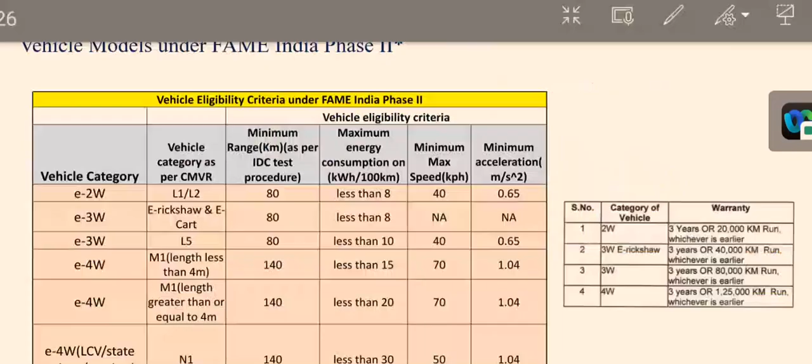So when we look at the automotive industry, just to verify, yes, my screen is clearly visible, the Indian automotive industry and opportunities. Is that slide visible? Yes, sir. It's fully visible, sir. No issues. Okay, fine.

So since the topic is more focused on India, I think there is a need to understand the Indian automotive industry or the automotive market. So if we look at the current market situation of India, of the overall automobiles running in our country, 81.2% is contributed by the two-wheeler segment, right?

Whereas nearly 14.6% of the total automobiles in India are passenger vehicles, nearly 3.1% in the commercial vehicle segment, and 1.2% in the three-wheeler segment. So it is very clear that India has more two-wheelers. It's more of a two-wheeler population.

So what happens is, I think the government has set some target to 2030, that they want to go for more electric vehicles in 2030. Right, I think those ambitions are very clear. And why are those ambitions clear? Because in some way, India is a major two-wheeler market.

Gopi, sir has been muted. Sir, you can click those three dots, go for those options. Gopi, sir has been muted, kindly unmute, sir. Yes, now it's okay, sir. Gopi, sir has been muted. Sir, please unmute, Prashant sir. Click that Cisco Webex. Yes, sir, unmuted. Wait a moment.

Is my screen visible, sir? Yes. So in addition to this strong demand in India, very recently the government of India has released this subsidy.

This particular information may not be aware to many people. This FAME subsidy announced by the central government of India, and even by some state governments, is only applicable for vehicles which meet the minimum eligibility criteria. For example, an electric two-wheeler should have a minimum range of 80 kilometers, a minimum maximum speed of 40 kilometers per hour, minimum acceleration of 0.65 meter per second square, and the energy consumption should be less than 8 kilowatt hour per 100 kilometers. These are all different eligibility criteria. In addition, the government of India has clearly notified in FAME 2 that only batteries with advanced battery technologies like lithium ion batteries, lithium ferrophosphate, lithium nickel manganese cobalt - lithium based or other advanced batteries - are eligible for this FAME 2 subsidy.

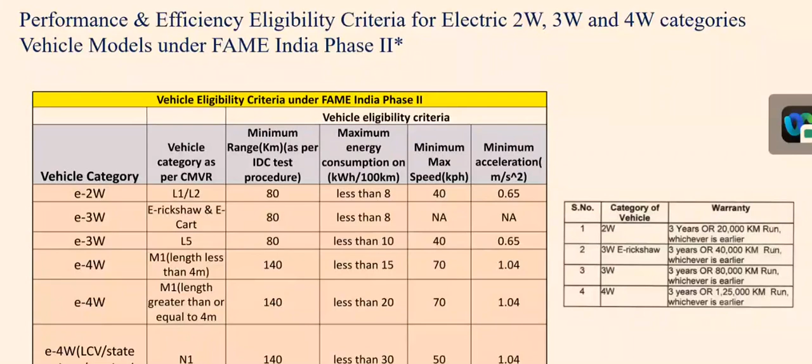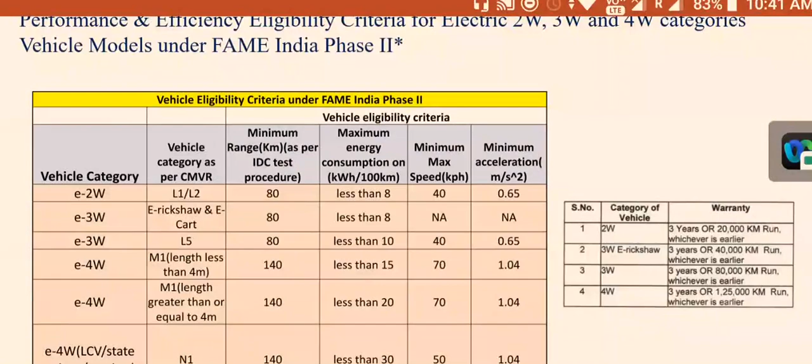There are also minimum warranty requirements - for two-wheelers, the vehicle should have a minimum 3-year warranty and 20,000 kilometer warranty minimum. All these things help us to meet the demand, the particular requirement of the customer.

Now, once we come into this electric vehicle domain, one of the challenges is throughout its product life cycle, the electric vehicle has so many challenges. When we look at cradle to gate - that means the production area, starting from raw material extraction and component production, into vehicle level assembly - we call it cradle to gate. In this region there is a lot of energy utilization happening. Even though electric vehicles are shown to be very clean, green vehicles, in my personal perspective, electric vehicles are not something very green. Obviously it has its own challenges. One of the main drawbacks of electric vehicles is its dependency on raw materials. Today's electric vehicle is completely dependent upon some key raw materials in the industry.

I think that's a threat for the whole industry. If these raw materials are not available at a point of time, then the whole system will collapse. So there is a huge demand on the material science domain, and people working in material science have a lot of scope for improvement in the electric vehicle domain, as currently the whole industry is dependent on certain key materials.

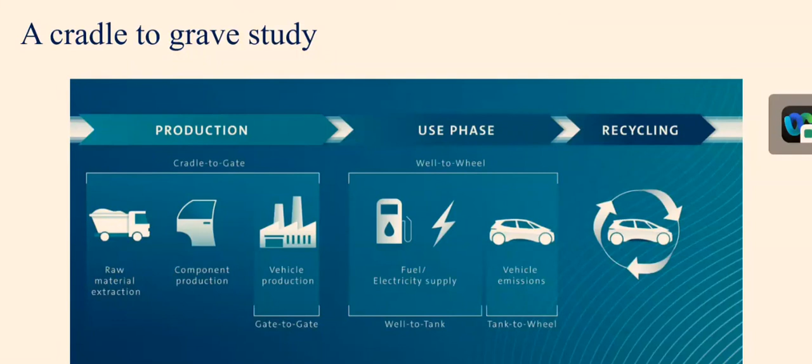The challenge doesn't end at the production and usage phase, it continues till the recycling phase. After the usage of the battery or these motors and components, what is the end of life? What is the ability of the component to get a second life? For example, if we have a battery pack, how is the vehicle or battery design carried out to provide readiness for a second life? So what is the recyclability?

There are many challenges in this area. So anyone interested in working on sustainable things has a huge scope on areas like improving the recyclability of electric vehicles, improving the recyclability of batteries, improving the recyclability of motors. What are all the things that can be done to improve recyclability?

Imagine we are using a battery pack for 15 years in an electric vehicle. After 15 years of its lifetime, what is the remaining capacity? What is the capacity fade that had happened in the battery? And what is the possibility for the battery to be used in a second life application, maybe an energy storage application? What is the possibility for such kind of things to be available for the industry?

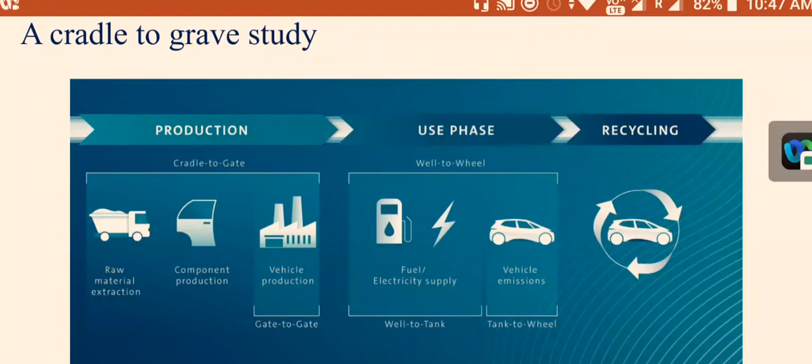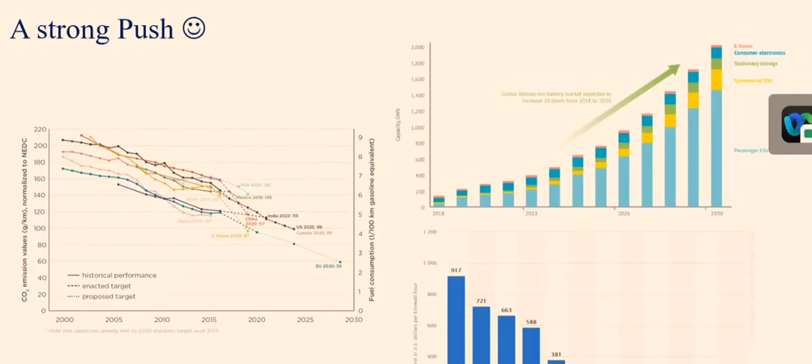So when we come to the success of this electric vehicle industry, one of the very challenging aspects is material choice and lightweight design. When we talk about material choice for this electric vehicle domain, it is actually attributed to three important areas. One is performance.

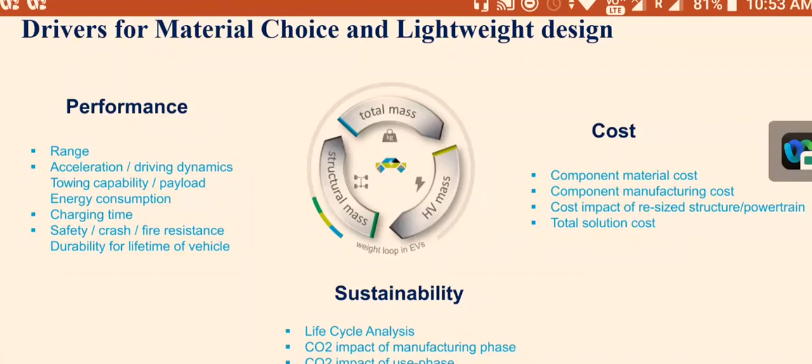So currently the industry is using the combination of aluminum, mild steel, high strength steel, and ultra high strength steel. So a good amount of research is needed in order to understand the benefits of having a blended mix of materials in the electric vehicle domain.

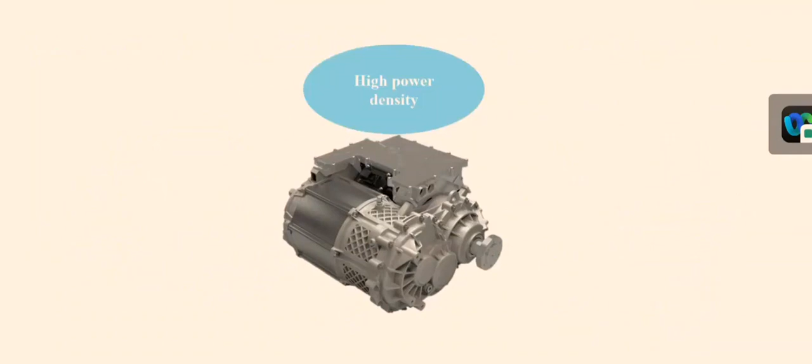So when we look at this e-drivetrain, the electric powertrain system, we have so many key areas where improvements are needed. One is high power density and high torque density. Today the industry needs an electric powertrain with a very high power density and torque density. So high power density means what? The motor, the inverter, the power electronic system, or the whole traction drive unit, as we call it, should be able to deliver very high power. At the same time, it should occupy very little volume.

And as we move toward higher speed performance requirements, customers will be expecting higher speed. Some customers may demand more than 150 km per hour or 100 km per hour. So when an electric vehicle needs to operate at such high speed, obviously a wide speed range dependency will come into the picture.

So whether the electric motor technology that we are going to utilize has the ability to work at a wide operating range, and how to improve the motor control to operate the motor in a wide operating range, because the modern electric vehicle demands motors operating close to 20,000 RPM. Can you imagine an electric motor of say 20, 30, 50 kilowatt operating at 20,000 RPM? Obviously, there are going to be many challenges.

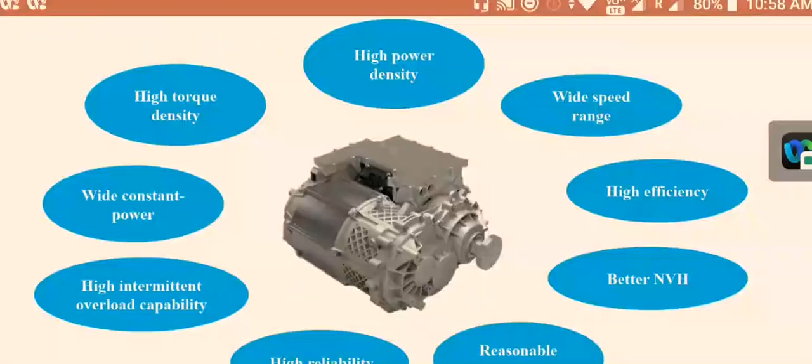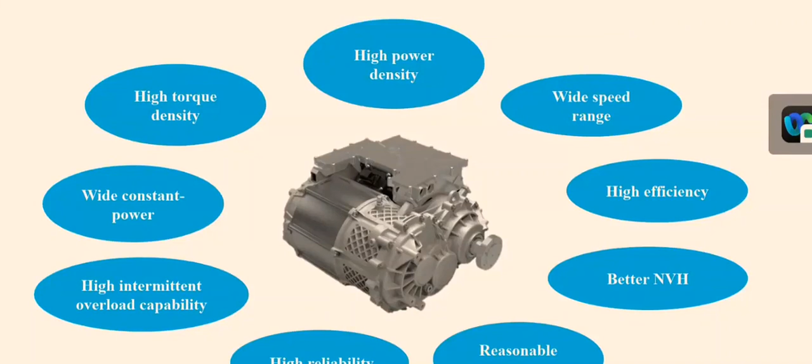For example, can you imagine a situation where an electric vehicle starts from a gradient? Imagine the gradient is almost 30 degrees. Can you imagine the amount of torque required for the electric vehicle to negotiate such a demand? Definitely it is going to be a very challenging journey for the electric vehicle. So an electric powertrain should have the ability to withstand such overloads, which can happen intermittently. Overall, these are some of the key challenges in the electric powertrain domain.

In addition to this, it is very important to have a target in our mind. Even in India right now, I'm very worried that in some cases the government of India or even the research associations in India have not clearly given guidelines for the research scholars or the faculties. I'm really worried about it. And if it is available, it is not reaching the faculties either.

Any of the faculties here, have you heard any targets from the government, like this is the kilowatt you have to achieve, this is the cost target, this is the power density target we have to achieve? Have you heard anything like that from the Indian government? Are there any such ambitious targets?

No. So when we see India in terms of research, we are definitely lagging a lot in that area. So what can drive research is basically a target. An ambitious target is very important, right? An ambitious target is not only for the industry, it is also for the academic research professionals, because these kinds of targets from the government will basically give a boost for the faculties or the research scholars to perform the research activities in this area.

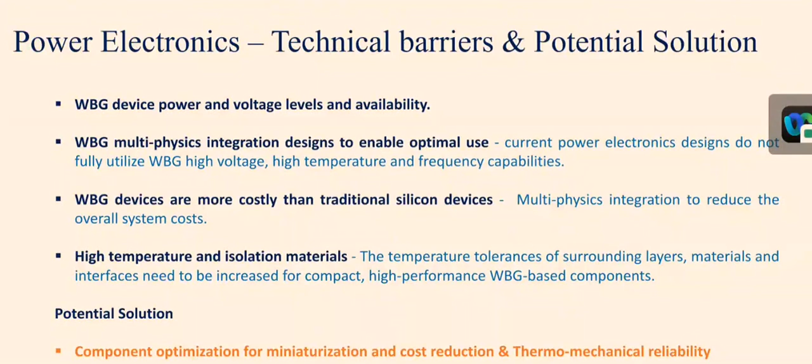Many times, people misunderstand this thermal management area. This is not only for the electrical and electronics segment. Mechanical engineers, mechatronics engineers, and people from these backgrounds can utilize the model-based development approach to optimize the system and improve the performance of these power electronic components. That's very important. Some of the technical barriers today are in attaining high density power electronics.

If I focus clearly, it is basically the ability to remove the heat. If we expect a power electronic inverter, a DC-DC converter or an onboard charger to perform at its maximum potential, they will generate a lot of heat. So the challenge is how we are going to remove this heat, and the capability of the material technology to withstand this heat. That is where the focus is. When we move to high density power electronics, the challenge is the ability to remove the heat.

This could be achieved by better materials to reduce the losses and the size, along with improved thermally conductive materials and better thermal management techniques. And at the same time, higher switching frequencies. As we go for these wide bandgap semiconducting switching devices, we'll be going for higher frequencies.

So they require better isolation, because as we move for higher voltages, higher frequencies, then the need for galvanic isolation comes into picture, right? So then, as a research scholar, we can focus on the operational behavior of a power electronic system in case there is a loss of isolation, right? Or you can also study the sensitivity of a power electronic system for a loss of isolation, right? So better isolation, how can we achieve better isolation in the power electronic systems?

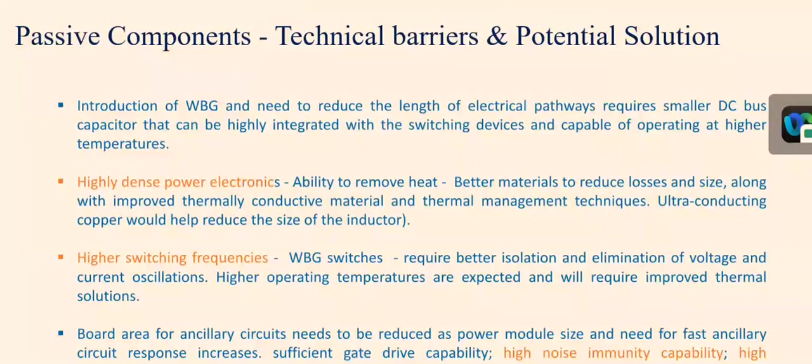So whatever research we do, if it could be in this particular area, definitely it could contribute some improvement for the OEMs, as well as to some of the suppliers, right? So today, for example, in India we are having so many global suppliers, companies like Valeo, companies like ZF. So many global suppliers are involved in component development of electric vehicles. If you research scholars focus on these particular areas which I'm talking about, these kinds of suppliers will also be interested to collaborate with you to further support you on the improvement areas.

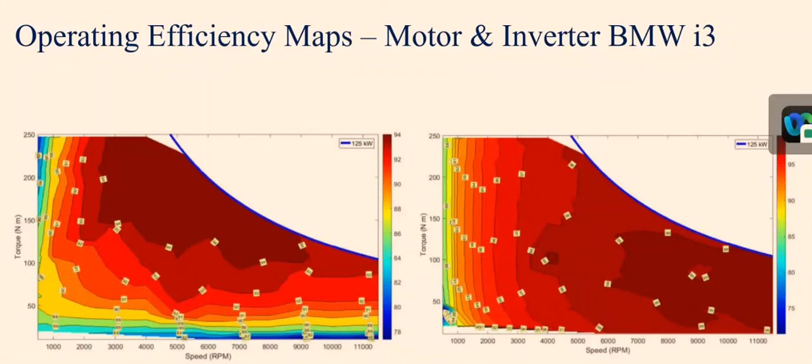And today the push is that we have to try to implement techniques in order to improve the efficiency in these particular key operating areas. Still, there is a huge demand, huge scope for improvement.

And when we come to the energy storage system, today the whole battery industry is completely dependent upon the materials. You can see the material composition today: lithium, nickel, cobalt, manganese, copper, graphite, aluminum, steel, right? Everything. So the whole battery ecosystem is completely dependent on the materials. And the key materials like lithium, nickel, cobalt, manganese are all very rare. They are all starting to deplete.

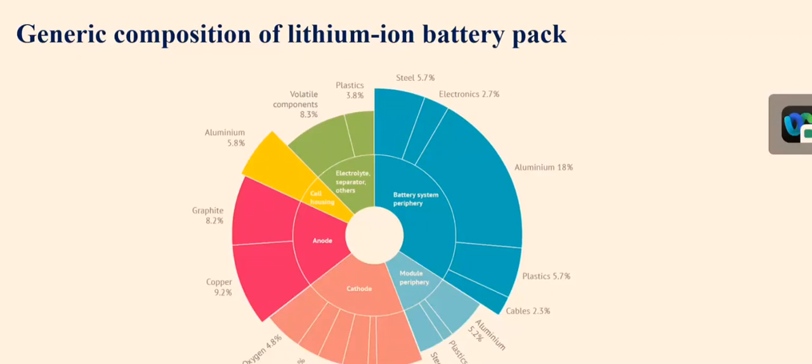I don't know how many people understand that, but especially people from the academic background need to understand that there is a huge potential for material science, metallurgy and manufacturing technology for the success of the electric vehicle domain, especially for the Indian market.

So if we look at the need for innovation in material manufacturing technology, we can clearly see nearly 56% of the CO2 emission comes from the battery. And you can see very clearly 28% of the CO2 emission of the overall electric vehicle is attributed to the battery's cathode. Right? And in addition to that, the remaining 28% is on the battery cells, the other remaining components of the cell. So nearly 80% of the CO2 reduction potential is specifically in the battery related aspects.

So I urge all the faculties here, all the research scholars here, to put all your efforts into improving this key battery area, because even though these electric vehicles do not emit pollution directly in the form of gases, the dependency on these materials will definitely bring more and more pollution to the environment. So I request all the faculty, research scholars, or research people from different backgrounds to focus on improving the battery and the other segments.

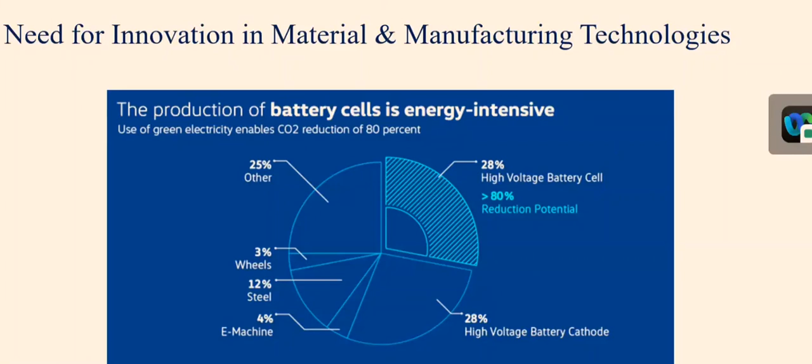So one of the areas is to bring up the second life for electric vehicle batteries. Your research could focus on how to improve the second life of the battery. Can you imagine, for example, an electric vehicle running for 10 years. After 10 years, I am taking the battery pack out of the electric vehicle. Can this battery pack be used for other energy storage applications? Yes or no?

The answer depends upon how the battery was utilized throughout the life cycle. When the battery entered the electric vehicle, how was that battery utilized? What was the temperature the battery was operated at throughout its lifetime? Throughout, for example, the 10-15 years of its operation in the electric vehicle, what was the average temperature it was operating at?

What was the capacity fade attained on the battery? The capacity fade is a very important factor which decides the second life of lithium batteries. So as a research scholar, you can focus on improving the capacity fade, how we can reduce it on the batteries. And capacity fade doesn't mean we have to focus only on the cell or battery, but how we can improve the operational behavior of the electric vehicle.

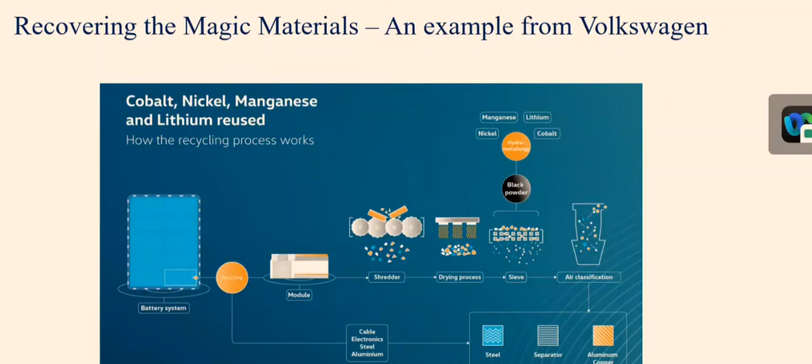So the research could focus on how optimally we can recover these materials, what innovative techniques and ideas can be implemented to recover materials from batteries, and even from other key components of the electric vehicle. When we talk about the electric vehicle battery enclosure, the enclosure design is also a very challenging area today for research scholars in mechanical, electrical, and electronic backgrounds.

I strongly oppose research and development happening in only one department. I am a very strong opposer of that. One thing I always appreciate is collaborative research. I always request people from mechanical background to tie up with the electrical department, and the electrical department to connect with mechanical, and people to collaborate together. Unless research happens this way, it's very difficult to reach a fruitful result.

A collaborative research environment has to be created in your research institution. If you are a mechanical faculty or research scholar, try to get in touch with electrical and electronic people and involve them in your research. Similarly, electrical and electronics research scholars should involve mechanical people, because the whole industry is completely blended, and focusing on only one segment can't address all the challenges. The battery enclosure, and the whole battery segment, is a mix of mechanical as well as electrical aspects.

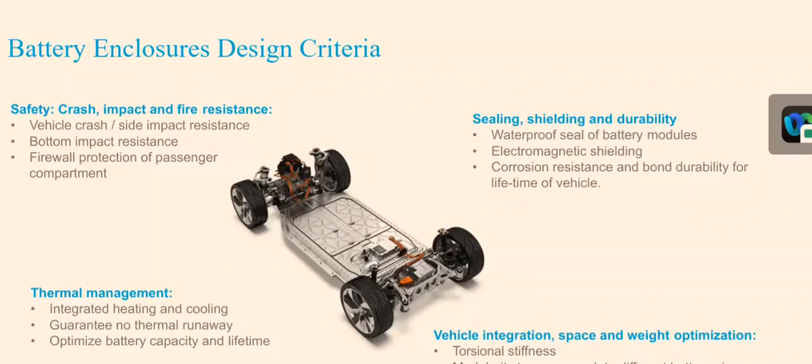Research can focus on improving the durability and shieldability of these components, improving the corrosion resistance with respect to the environment and the passenger compartment. And how can we use weight optimization techniques to further improve torsional stiffness, structural rigidity, and weight minimization - these are some key areas on the battery enclosure.

In addition, the battery and the charger both have a challenging area from the control perspective. We can utilize various control strategies for extension of the battery's lifetime, enhancing the performance of the battery system by managing temperature, charging conditions, and electrical duty cycles - all of which will improve the lifespan of the battery.

By implementing proper and innovative control strategies, we can improve the ability to detect safety failures and safety critical situations in the battery system. So research can focus on developing innovative techniques which can detect failures at a very initial point in time.

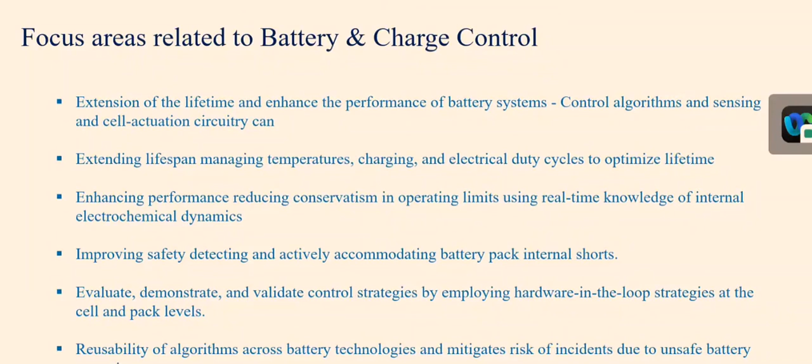In addition to fault detection, one key area we can focus on is prognostic-based control. This is essentially the development of a supervisory controller which can dynamically adjust the control limits of a battery system over the course of the battery's lifetime.

Research scholars can focus on developing prognostic-based control strategies which can help improve the overall performance of the battery pack, while maintaining the ability of the pack to achieve a better second life condition. There is a strong demand for better algorithms today.

As a team, electrical, electronic, and mechanical people, mechatronics engineers, research scholars can work on developing algorithms that could adjust the charging speed of individual electric vehicles in terms of charging technology - how to utilize the available charging technology more efficiently.

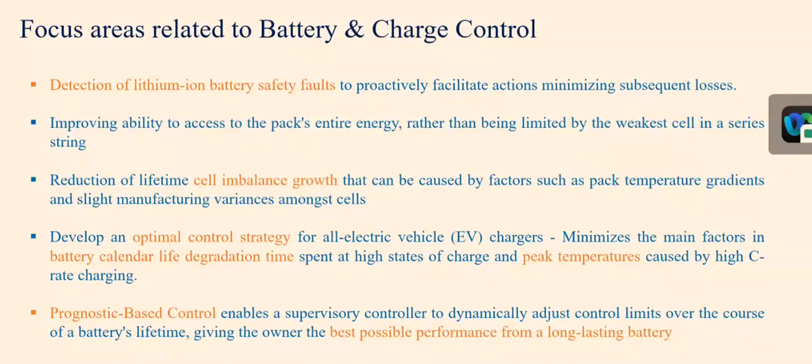How to implement different algorithms that could adjust the rate of charging for different electric vehicles plugged into a complete charging infrastructure - there is strong demand in all these areas. We need to understand and address the temperature related issues.

Today the DC-DC converter topology also has many challenges. People are implementing both single-phase PFC topologies and three-phase PFC topologies, and both have their own challenges. For example, with single-phase PFC topologies, the ability to operate in discontinuous conduction mode as well as continuous conduction mode is very important.

Reducing the need for the number of power electronic semiconductor switches is important when developing DC-DC converter topologies. At the same time, some three-phase DC-DC converter PFC power factor correction topologies have disadvantages or barriers, like a strong barrier on achieving higher power density.

Some topologies in the DC-DC converter have higher EMI, electromagnetic interference, so we need to improve the converter's performance with respect to the electromagnetic interference environment. Also, there's a need for research to achieve a very high level of efficient bidirectional mode power transfer ability.

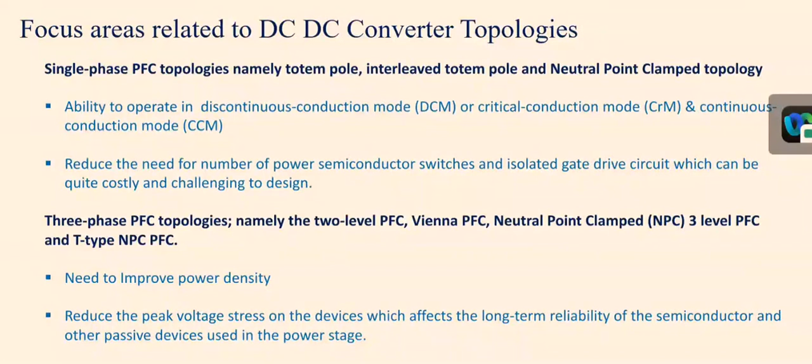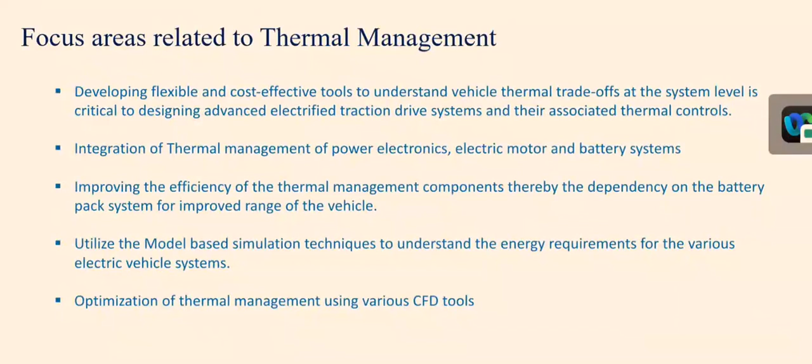In the coming days, our research should focus on all these key areas with respect to your specialization. With respect to thermal management, we see thermal management issues everywhere across all the components I mentioned. For all these things, you can utilize various software technologies - we have many CAE optimization softwares.

On the NVH side - noise, vibration, harshness - we can implement CAE simulation softwares to improve the overall noise vibration harshness characteristics. There are softwares like ANSYS and COMSOL that we can utilize for improving these characteristics.

At the same time, even the operational characteristics of the electric motor - different electric motors, either PMSM or induction motor - can be studied for their electromagnetic behavior. We can use CAE simulations to understand the electromagnetic behavior and further optimize their electromagnetic potential.

And also for mechanical engineering people, there's a strong demand. You can work on improving the structural ability of the whole frame.

All the whole chassis structure, also maintaining a safe environment for the battery packs. So you can focus your research towards developing innovative, optimized design structures which could actually improve the safety environment for the battery pack.

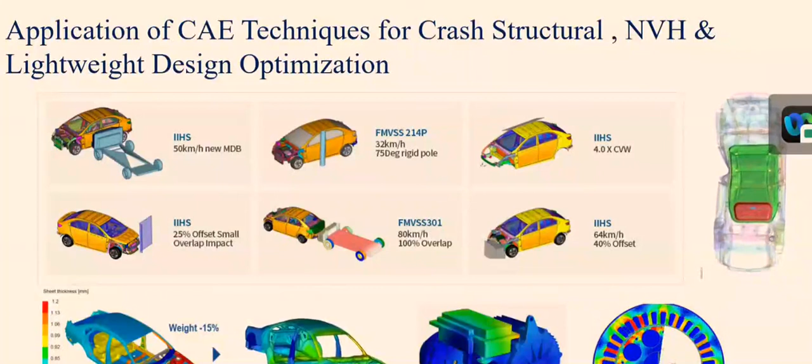So there is a huge thrust especially on performing CAE simulations. You can use the present CAE technologies, software technologies, to further improve the safety of the electric vehicle, the battery, or the internal high voltage components.

There is a huge demand to understand the fault conditions prior. So your area of research could also focus on how to understand the fault, how to detect the fault at an initial point of time. All these areas could definitely bridge the gap between the industry and the academic area.

I think I was given a very short period of time, so in this time I've just given an overall overview on different aspects that you can focus on as a research scholar, and definitely try to utilize the present software technologies available in the market to the maximum, because these technologies are helping us reduce the overall development time. I believe people can utilize these software in a better, optimal way to reach your destination. And I believe the upcoming sessions from different research scholars will bring up more ideas into each specific topic I talked about today.